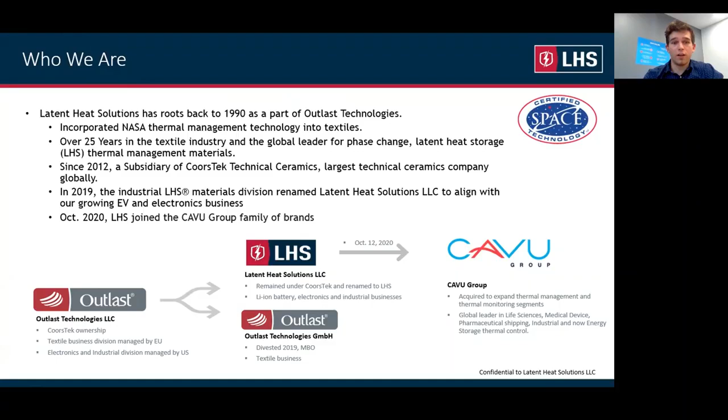Just a little background on who we are. We started as Outlast Technologies in the 1990s, and then we went into textiles with that technology, and eventually around 2012, we were acquired by CoorsTek and went into industrial applications such as battery packs. We've been in that space ever since then, and recently in October 2020, we were acquired by another thermal management and thermal monitoring company, group of companies, the CAVU Group.

So a little overview of what we're going to go through here. First, we're going to break this into two parts. It'll be a thermal runaway section and a thermal management section. So we'll give a bit of background on thermal runaway concerns, and then we'll go into proposed solutions to address those concerns, and then give supporting empirical data and test results, as well as some demo videos supporting that. And then we'll do the same with thermal management, addressing the background, proposed solutions, examples, and closing with a conclusion.

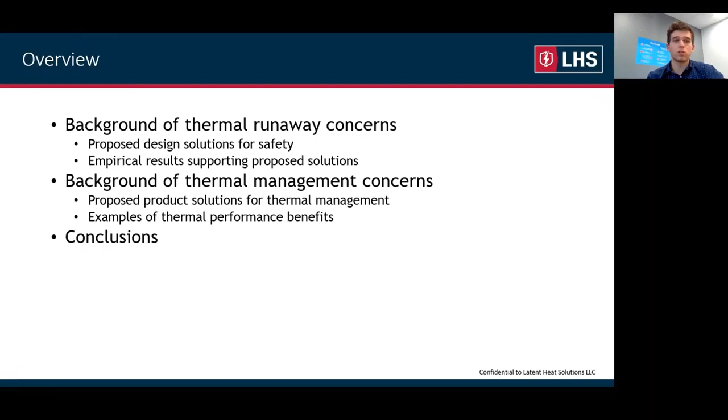So to give a bit of background on thermal runaway and cell ejecta, when lithium-ion cells reach a high enough temperature or are damaged in such a way and then reach a high enough temperature, they will continue increasing in temperature until they eject their electrolyte and core materials, usually resulting in a fire upwards of 500, 600, 700 degrees Celsius, which can damage other pack components, other cells, causing thermal propagation, and so on.

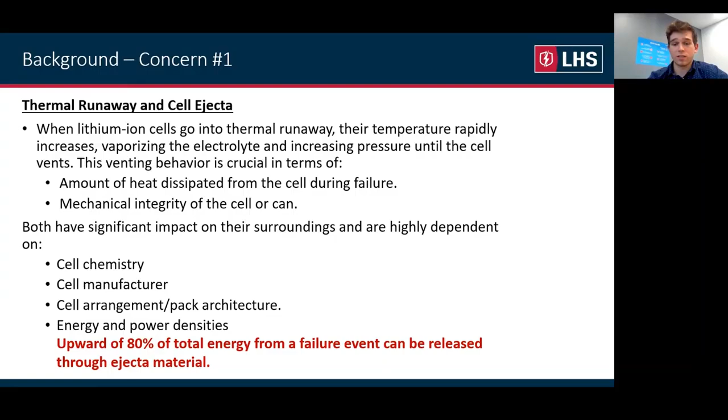And the behavior of the cell is very dependent on the cell chemistry, the cell manufacturer, how it's arranged in the pack, whether it's pointing at other cells in the pack, whether it doesn't really have much room for the pressure to get out, as well as the power and energy densities of the cells themselves and the whole pack. And upwards of 80% of the energy can be ejected from the cell during this event. So that 80% of the thermal energy can go directly into another important part of the pack. If it's a pack that's located on a person, into the person, or into adjacent cells and causing a larger fireball and a lot more damage.

So breaking cell ejecta out into a few different categories. We have ejecta coming out of the positive terminal, which ejects just the way it should through the vents that are designed into the cell. We have in newer cells an etched circle on the bottom that acts as a rear or a negative terminal vent that will eject gases and components out the back of the cell as well, usually both the front and back. And then we can also have the entire jelly roll ejected out the positive terminal. Instead of just venting gases and flame, it'll eject a bunch of shrapnel that can almost act as a nail penetration event or a crushing event for another cell.

And the worst of all that we found has been the side ruptures. So if just the can peels open and ejects all of its components at once into an adjacent cell that for most pack designers is 1.5 to 2 millimeters away. A lot of these events are stopped by pressure relief, PTCs, CIDs to stop the event before it happens. But in terms of damaging abuse events, such as that we use like nail penetration to test, or maybe there's a car accident, PTCs and CIDs are not going to stop that.

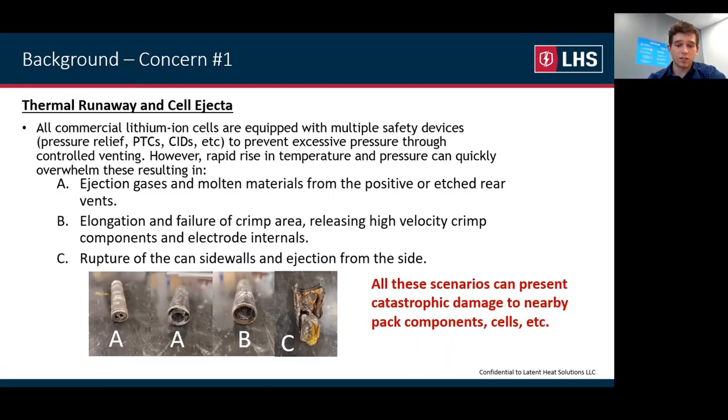Here's an image from a NASA presentation. They had a bomb calorimeter and they measured how much energy comes out of the positive terminal, negative terminal, and sidewalls. And they did a bunch of different cells. I pulled this one just as an example. This is an LG MJ1 cell, and it shows about 74, 75% of the energy is coming out of the positive terminal, just as it's designed to with the vents ejecting straight out.

Then in terms of more heat coming out of the sides, radiating out of the sides, not necessarily ejecting out of the sides, about 21, 23% there. And then a much smaller percent, about 3.6, comes out of the rear terminal, and that's because this one doesn't have a terminal vent. And with cells with terminal vents, we see 15–20% of the energy coming out there.

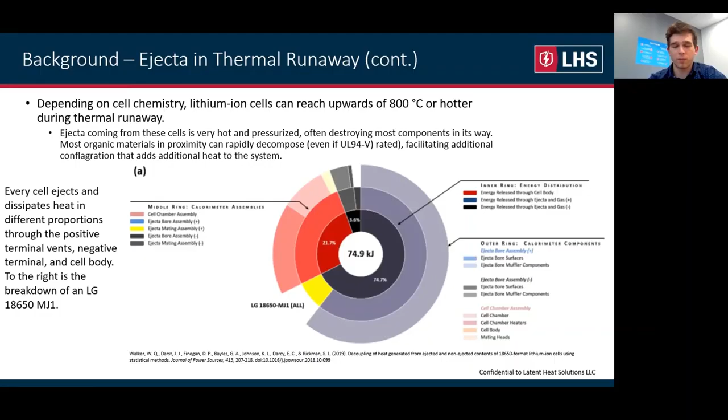So in terms of our proposed solution, we like to address 3 different aspects here for the design and implementation of materials or solutions. First is capturing and converting the thermal energy. So placing high latent heat materials at venting points, maybe just the positive terminal, maybe just the sidewalls, or maybe all parts of the cell that you can cover. This material then vaporizes into a non-combustible vapor. That phase transition absorbs a considerable amount of energy that is not going to the rest of the pack.

2, very importantly, is quenching and extinguishing further flaming to not add continued heat into the system, which will just continue to heat up adjacent cells beyond the heat from the trigger cell. And 3, and something that we discovered much later in the process, was blocking and deflecting ejected particles.

So you can put all these materials that absorb the thermal energy and quench the flaming, but if the cell ejects right into an adjacent cell, that cell can go within a second, and there's not much you can do to stop it unless you have a barrier material. This barrier material can take the form of metal sheet, ceramic plates, or even thermoplastics in a shape of a matrix to contain it.

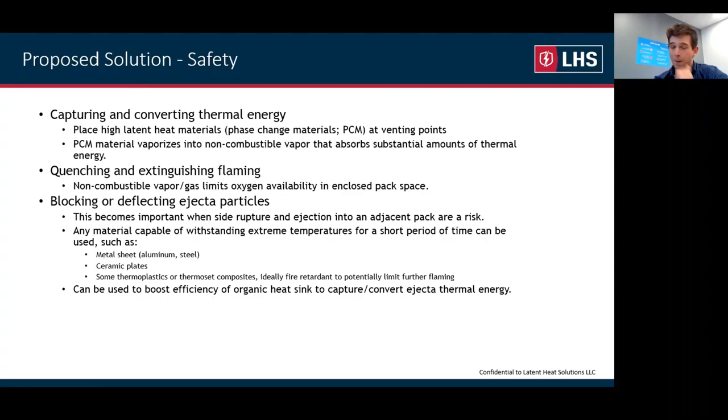So in terms of LHS's proposed solution for this, it takes the form of the XTS product. This is a non-traditional PCM gel with an extremely high latent heat of about 2,000 joules per gram inside an aluminized laminate pouch that is designed specifically for each customer to conform to their pack geometry. When the temperature of the cell gets above 105 degrees Celsius, it then vaporizes and begins absorbing that thermal energy off.

Just to go over the testing methodology, we wire all of our cells with Omega K-type thermocouples, and then we will initiate thermal runaway through either nail penetration at 8 centimeters per second, or hot wire, which, depending on customer requirements, is about 5 to 10 degrees C per minute ramp rate. Less commonly, we'll do an overcharge or short circuit, but most people are interested in hot wire and nail penetration. All the tests are safely performed in a ventilated fireproof chamber behind several layers of plexiglass, so that customers can come in and watch it, and we as the testers can watch at a safe distance. There's a camera on the inside, and there's a camera on the outside. And then at the end of it, we'll put all this into a report with post-mortem tests and setup pictures, as well as data analysis to deliver to the customer.

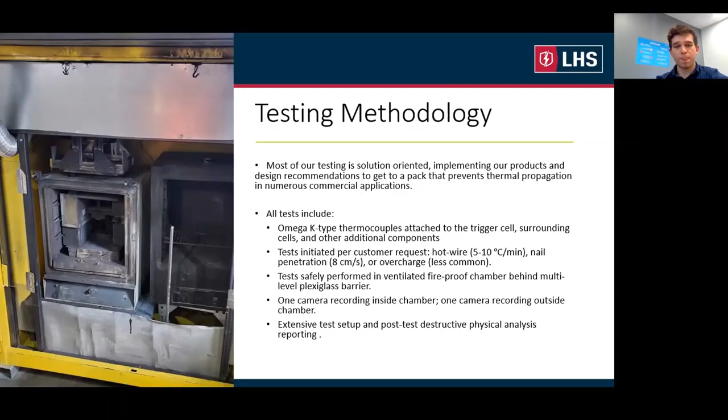So this first test that we did was using LG MH1 18650 cells in a 2S16P configuration. We put pouches on all sides of the 2 packs. There were 2 modules. The trigger module was directly facing the adjacent module, so in a worst case scenario, it'll just eject right into it. We have a lot of material here, and we also put Insulfrax barriers between every cell, so we were thinking to insulate any sort of cell-to-cell thermal transfer there.

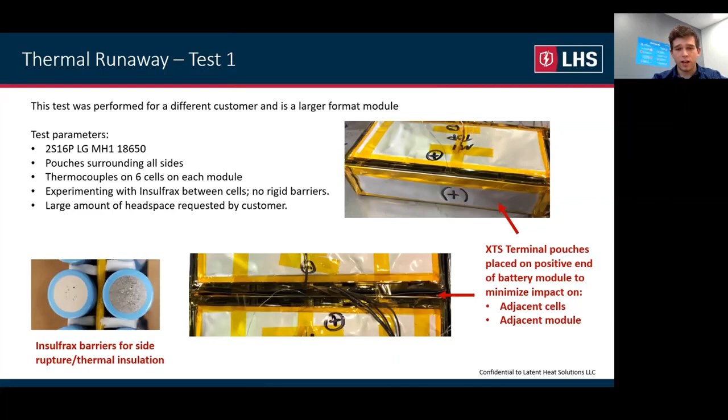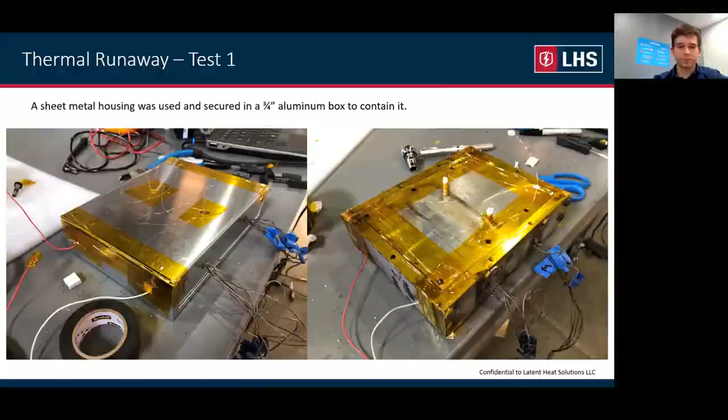There's 6 thermocouples on each module, so not all the cells are wired there. And then these modules are put into a larger enclosure with a bit of headspace per the customer's request, and then it was put into an even thicker, more durable container, so it didn't just blow apart during the thermal runaway. So we have that first cell going, and it was a nice big fireball. The flame seems to go out pretty quickly, but evidently there was another cell damaged in that first explosion, and then we just have a constant thermal propagation from this point forward.

So the data we see here is just showing basically full thermal runaway. So the first pack, immediately several cells go, and then a little bit of burning and the rest of the cells go. And about 800 seconds after the first thermal runaway from the trigger module, the adjacent module then all starts going at once. So we have complete failure of both modules in this case, despite the fact that we had all that material there, we didn't have barrier materials.

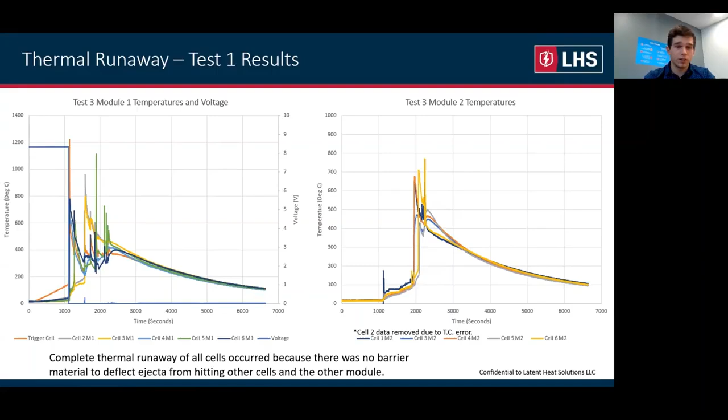So just to show you here how we reached that conclusion, analyzing the post-mortem images, we noticed a lot of side ruptures. So multiple cells were having multiple side ruptures. You know, they're coming out the front, the back, the sides. Essentially, that's why you're seeing such quick succession of thermal propagation throughout the cells.

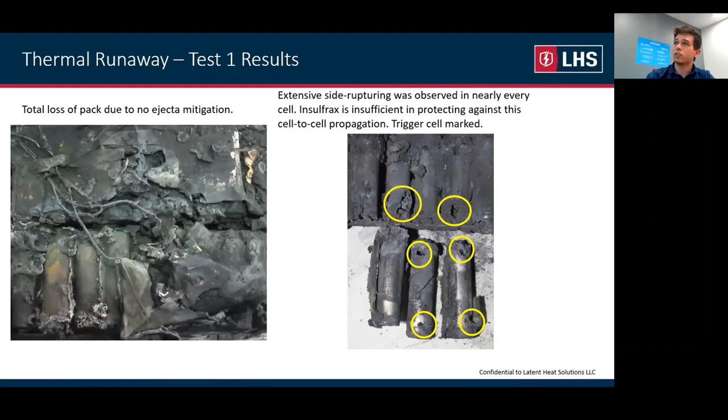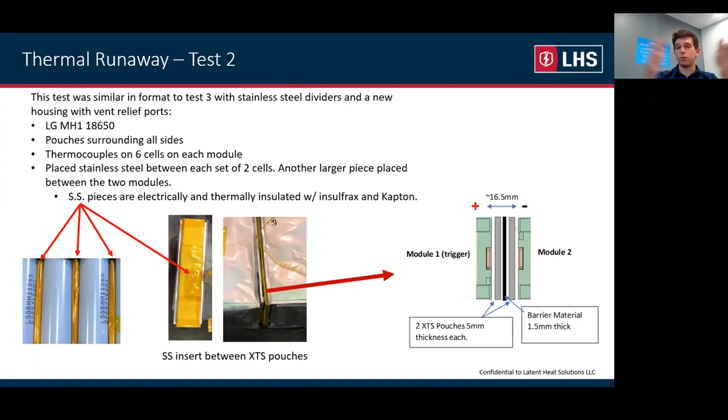So our proposed solution implemented then was the use of barrier materials, which took the form of stainless steel pieces, about 1.5 millimeters thick. We electrically and thermally isolated them with Insulfrax and wrapped with Kapton. And then we isolated every row of 2 cells in each module, and then we put another barrier material between each module to protect from front ejecta, and then if it wanted to eject into the sides. We also bolted it down per customer request, just so it wasn't moving around in the pack.

This is the video of that test. So much subtler explosion to start with. Just a puff of gas. So then we have the second cell going there.

And still no fire from that. So this is the data from that test. So a lot less chaotic than the first round test that we did there. In that, we saw cell 1 and 4 fail within about 40 seconds of each other. And the next hottest cell got to about 115 degrees Celsius, which is hotter than it should get, but it wasn't enough in this case to cause it to go to thermal runaway.

So the reason why cell 1 and cell 4 went is because in our numbering scheme, cell 1 was the trigger cell and cell 4 was directly below it, separated on either side by the barrier materials. And then we had the XTS pouches to absorb the thermal energy on tops and bottoms, fronts and backs. And then it protected the adjacent module with another piece of metal in front of it there.

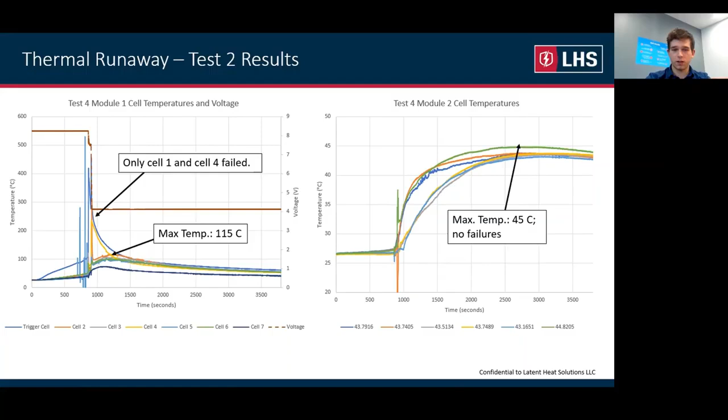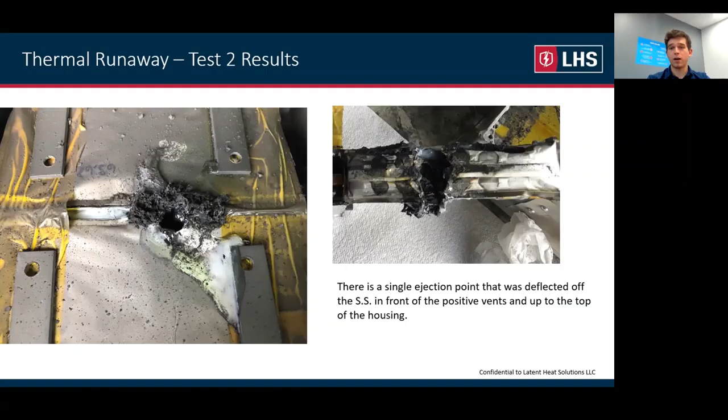So this is a really good picture showing how the ejecta hit the pouch, went through the pouch, hit the barrier material, and then kind of just shot straight up with one single path. The whole time it's going through that path, it's losing thermal energy by that phase transition of the XTS gel.

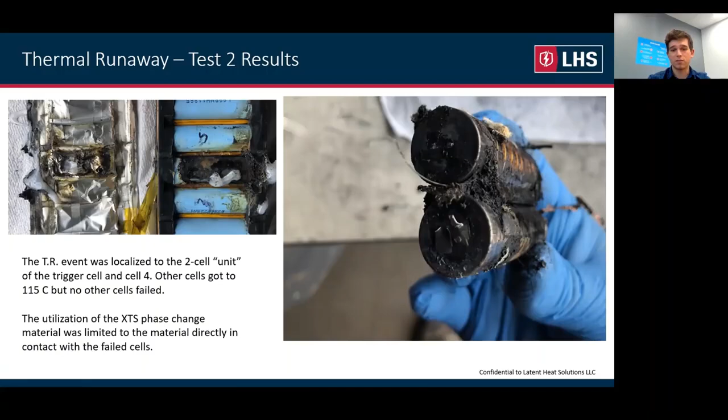This picture shows cell 1 and cell 4 that went to thermal runaway. And if you look on the left, I like this picture a lot because it shows the trigger cell with the wrapper burned off, but the adjacent cells, which are 1.5 millimeters away, their wrappers are wholly intact. And then the pouch, you can see where the material was used on it. And then on the top and bottom or left and right, there's still material left for it to access in case further cells go to thermal runaway.

Hi, my name is Joe Kelly. I'm Director of Product Development at LHS, and I'd like to take the second half of this presentation to discuss thermal management from a performance perspective.

Now, Gunnar talked about thermal runaway and the thermal challenges that are associated with it, and really looking at the factors of battery pack design still apply with respect to cell spacing, cell configurations, additional pack components in terms of cell holders, housings, etc. All of which really need to be looked at, really trying to manage the heat from a system to get you the performance that's required.

And so during normal charge and discharge, in particular pack applications, the self-heating of the pack really provides a lot of that heat, which can be damaging, especially at higher discharge or charge rates. And environmental conditions also play a big impact, especially in regional areas where high ambient temperatures need to be managed to properly get the performance required from a particular design or application. And I think most people are aware that as these particular lithium-ion chemistries see higher temperatures, they have a susceptibility to degrade electrochemically, mechanically over time, which really translates into a loss in capacity or loss in the ability to store charge, which at the end of the day gives you shorter operating times.

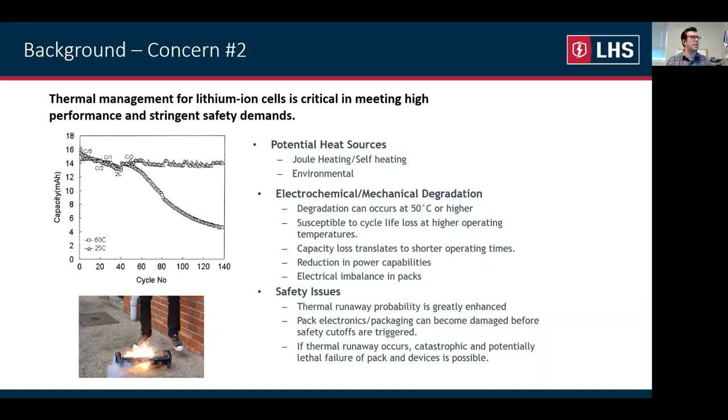Now, when we're looking at a thermal management solution, both from a safety perspective as well as from a performance perspective, a lot of times you see in the market, there's just not a one size fits all. A lot of times, when you're looking at thermal management, you want to try to minimize as much heat transfer from a particular cell or module to another. The big delta T's from that event are really hard to manage. And a lot of times what happens is it actually affects detrimentally the operational conditions of a particular pack.

Now with the XTS, we've tried to address both aspects of thermal management in terms of safety and performance. So, from a thermal runaway perspective, like Gunnar mentioned, we utilize the phase transition of the gel material within these packs and its high thermal dissipation energy to help with thermal runaway. However, for more normal charge and discharge type of operations, we're utilizing the high specific heat capacity of the material. Again, acting as a heat sink, absorbing heat off the cells, like a traditional PCM, but we're not using any latent heat in this case.

And a lot of times, if you're looking at it from a traditional phase change standpoint, we're actually able to utilize this material pretty effectively, with pretty similar performance characteristics. The reason is we're able to make the material into a conformable pouch that helps us localize the material, so we can ensure good cell surface contact. We're targeting the material in a particular location, being more efficient in how we use it and minimizing parasitic weight, which is always a concern in a battery pack application.

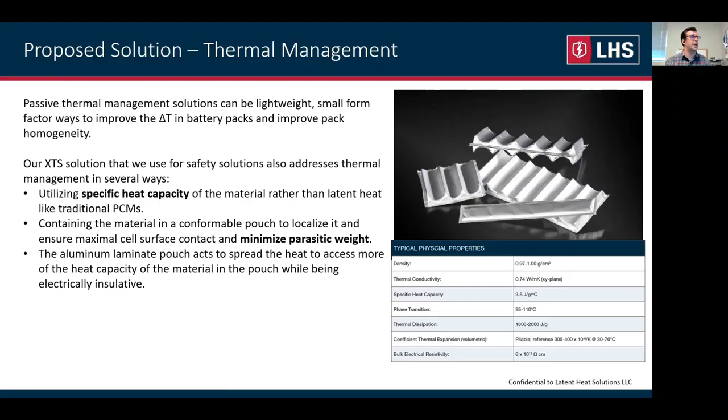And as I mentioned before, we're using this as a heat absorbing material, but we're not using latent heat. From a PCM perspective, on a numbers basis, you have a certain amount of material applied around a cell or a pack, and at a specific phase transition band you can absorb a decent amount of heat compared to what a specific heat or sensible heat material could do. However, a lot of times you're just not utilizing all that material, all that mass around a particular heat source, either because of thermal conductivity or it's just not applied right.

So, for example, in this test we have a small 1s4p configuration using 21700 cells, discharging at 1C at an ambient of 25 degrees C. We're applying a traditional PCM versus our XTS at the same weight per cell under the same conditions. This particular PCM has a transition band of 30 to 40 degrees C, which is right in line with the temperatures of this pack. With the XTS being more effectively utilized, we see that the XTS performs better than the PCM.

So we're seeing, compared to a control pack with no thermal management at all, a 21.6% lower delta T on the cells, versus the PCM, which is only at 13.9%. And again, it's all about effectively utilizing as much material as possible in a particular pack configuration or architecture.

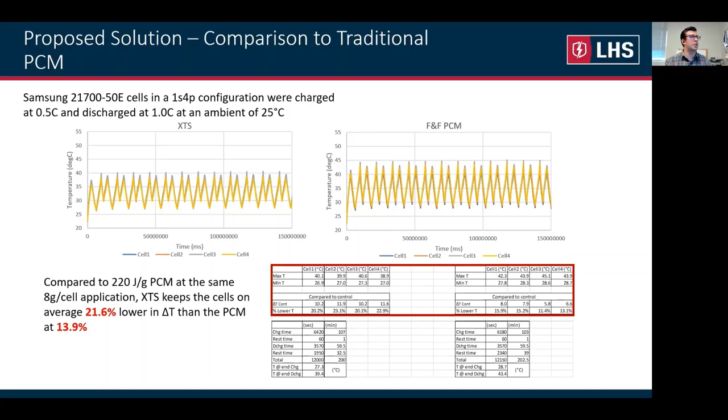Now, if we look at it from the standpoint of XTS thermal management from a passive perspective, this test is an example. Again, we're using 21700 Samsung cells in a 1S3P pack. In this case, we're discharging at 1.5C versus the 1C for the previous example, and we're at a cell spacing of 1.9 millimeters. From a control perspective, without any material in there at all, average cell surface temperatures at the end of discharge get up to 70.1 degrees C.

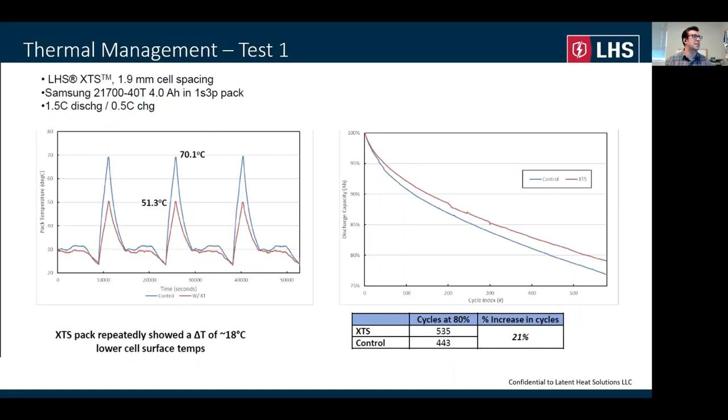And with the XTS, we're 18 degrees C lower at the end of discharge, at 51.3 degrees. So a significant drop in temperature, because the material is able to absorb that heat off the cell. Over time, you're reducing the thermal history, or thermal stress, versus the unthermally managed control example. That results in a better discharge capacity retention over time. In this case, we're seeing a 21% increase in cycle life measuring capacity retention at 80%. That's because we're helping keep these cells cool, minimizing stress, which leads to less degradation of the cells over time.

Now, of course, like I mentioned before, environmental factors have a big effect on the thermal management solution you're trying to design. A lot of times our customers operate in regional areas with 35 to 45 degrees C ambient conditions. So in this test, we're running a similar small pack, but with 18650s. The cell spacing is smaller, 1.5 instead of 1.9, and our discharge rate is higher, 2.5C versus 1.5 for the last example. We're running this test at a 37 degrees C ambient.

And we're still getting a very good temperature reduction from the XTS material on the cells versus a control pack that's not thermally managed. At the end of discharge, we see 71.6 degrees C for the control pack versus 58.1 degrees with XTS, about 13.5 degrees C lower. And again, going back to traditional PCM applications, you really have a challenge in higher ambient condition environments of putting a PCM into a pack and having it still provide a thermal management benefit, but not have it already be melted at ambient condition.

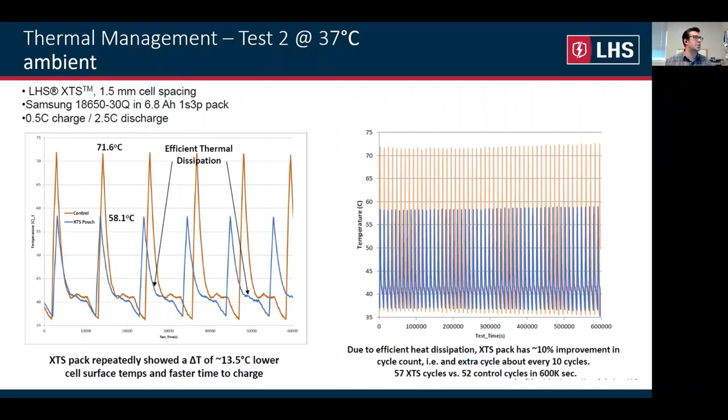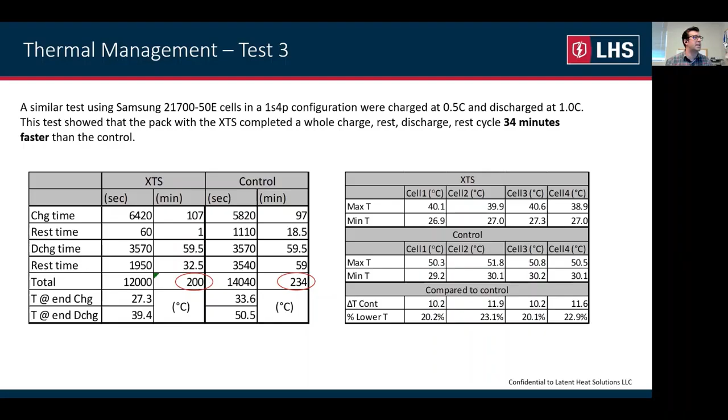So this, of course, obviously has an impact on particular applications such as swappable battery packs, or swappable designs, as well as power tool applications where you want to be able to take a pack right out of the application that you're using it in and charge it up as quick as possible, so that a user can use that again. So again, another big thing to look at when you're looking at thermal management design is what the end goal or end application is being used for.

Now, one other thing I want to talk about too is tab cooling. And I know there's been a few things out there regarding the effectiveness of tab cooling. But if you look at it from a perspective of the cell, thermal conductivity is always higher in the Z direction than it is in the X and Y on a particular cell. So, most of the times we have the ability to absorb heat off the cell surfaces, but if we can absorb heat off the positive and negative tabs, it actually does provide a benefit here.

And so for this particular example, we have this 5S9P battery pack that has our XTS SC1 composite as an inner layer. But what we're doing is we're putting our XTS pouches, which Gunnar mentioned before is pretty critical in any sort of ejecta management or ejecta control, directly onto the tabs themselves. And we're applying that with a little bit of a thermally conductive transfer adhesive. And what we're seeing during a 1C charge at 18 degrees C ambient, starting at a 36 degrees C condition, is an average temperature reduction of the cells of about 4 to 5 degrees C, between having pouches on or off the tabs.

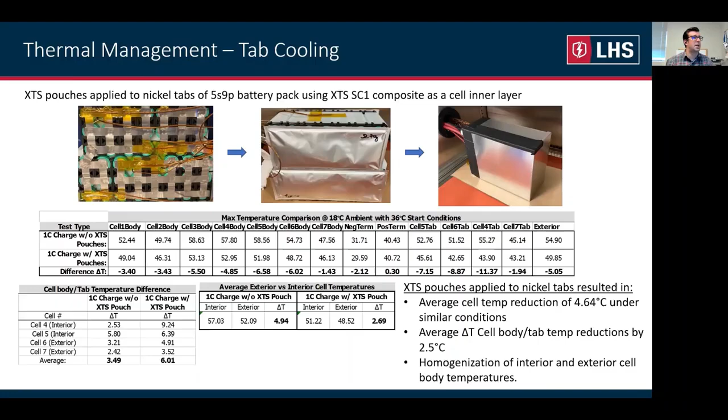So to summarize, when developing a thermal management solution, both from a performance and a safety aspect, there's a number of considerations that need to be addressed. Particularly for thermal runaway, there's a number of mechanisms that all need to be managed to provide an optimized solution to mitigate thermal runaway. And these have a big impact on the overall pack design considerations. So our approach with XTS product is to have a customized solution that's able to meet a particular thermal problem, both in safety and performance, but then it can also be tailored to a diversity of pack designs.

So while being primarily passive, which is a benefit for smaller format batteries, the XTS product line can be coupled with active cooling methods, particularly for larger format batteries, to provide a synergistic effect where you have the benefit of thermal management from the active cooling system, but then also this passive thermal mitigation for thermal runaway benefit from the XTS. So by having a product that has both properties that allow it to be thermally managed and mitigate thermal runaway, we have an ability to offer a simplification in the design phase for a particular thermal challenge within a customer's pack application.